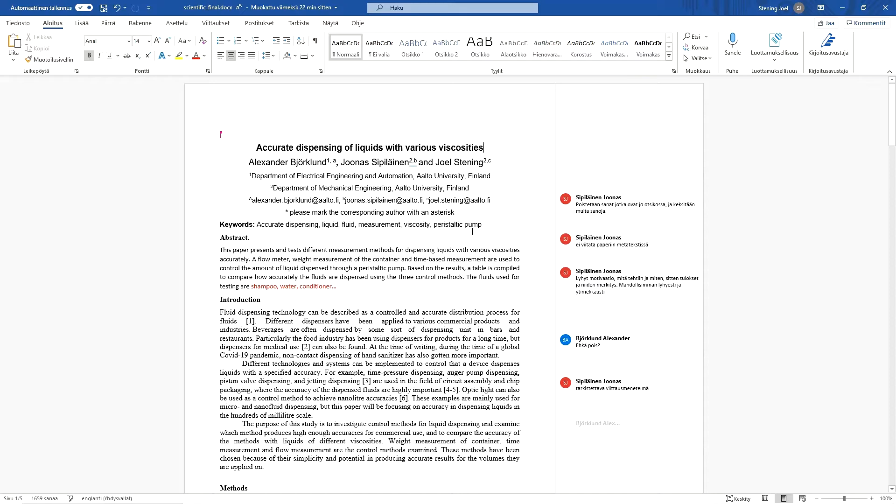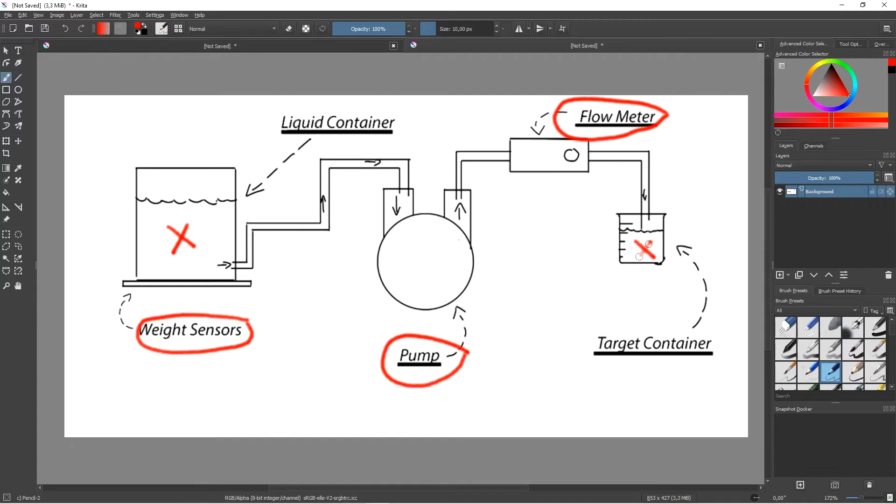And how we did this was that we measured - we did all these tests always for water, shampoo, conditioner, and then hand sanitizer. And for all of these different liquids, we did 3 points with 3 repetitions.

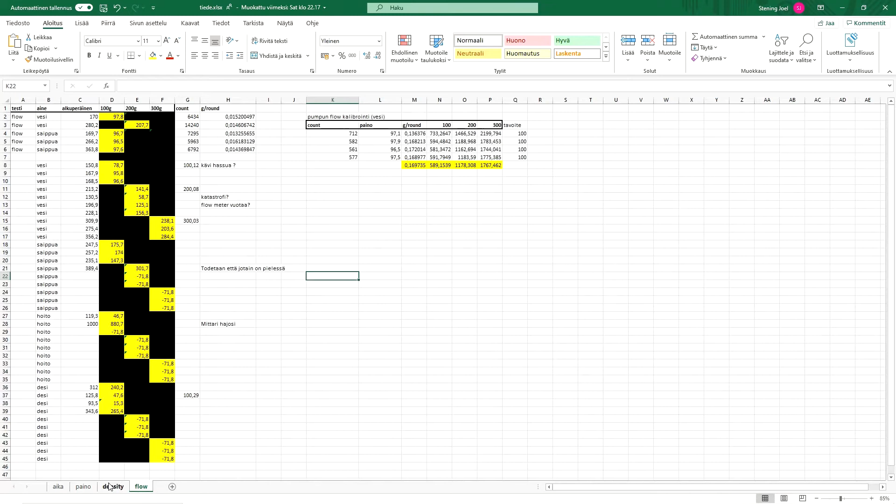How we verified how much we have been pumping was with a scale, which you might have seen in the video. And depending on the measurement, we had different methods of weighing the achieved results.

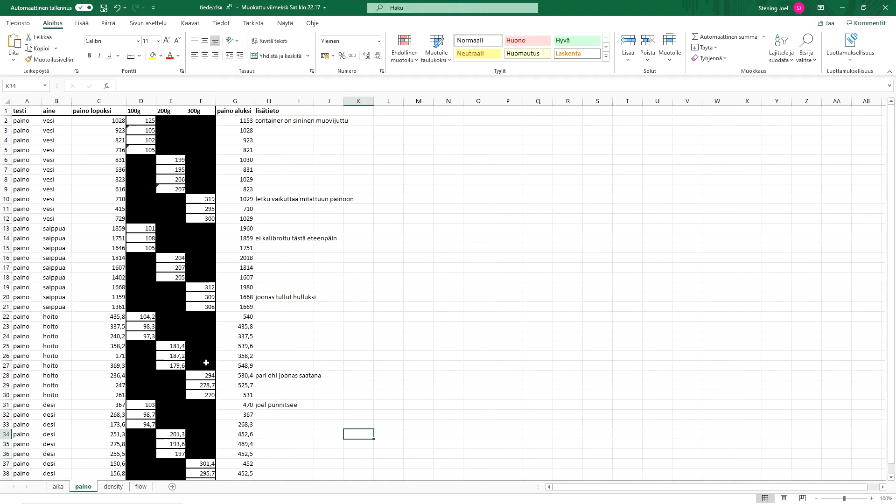On a quick look, we came to the conclusion that the best way to track the weight change or the liquid dispensed to a container like this is actually using the weight sensors.

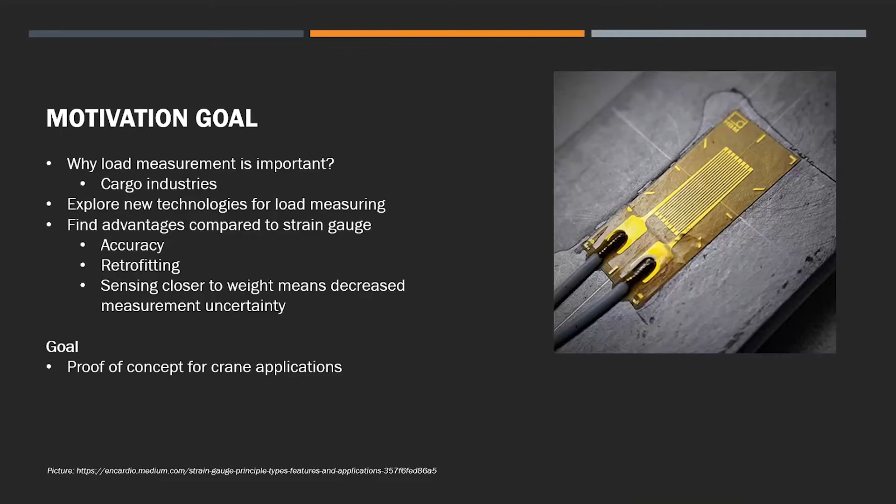It is very important that the material of the core is ferromagnetic. Otherwise, this won't work. The primary coil is connected to a power source.

When we allow the current to flow inside it, the core will be magnetized, and the voltage will be induced in the secondary coil. After the setup becomes stable, we apply force onto the core and observe the change in the voltage in the secondary coil.

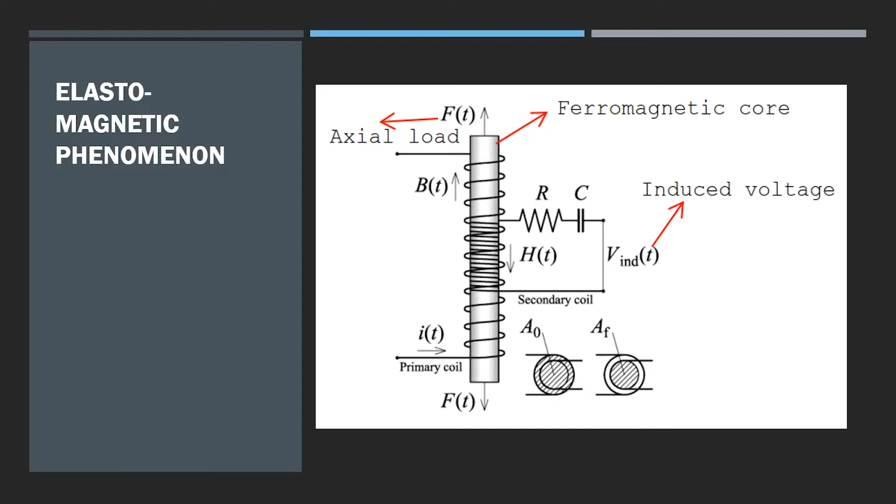From this, we can formalize a relationship between applied force and induced voltage. And so after we got the idea, the project steps become quite clear and simple.

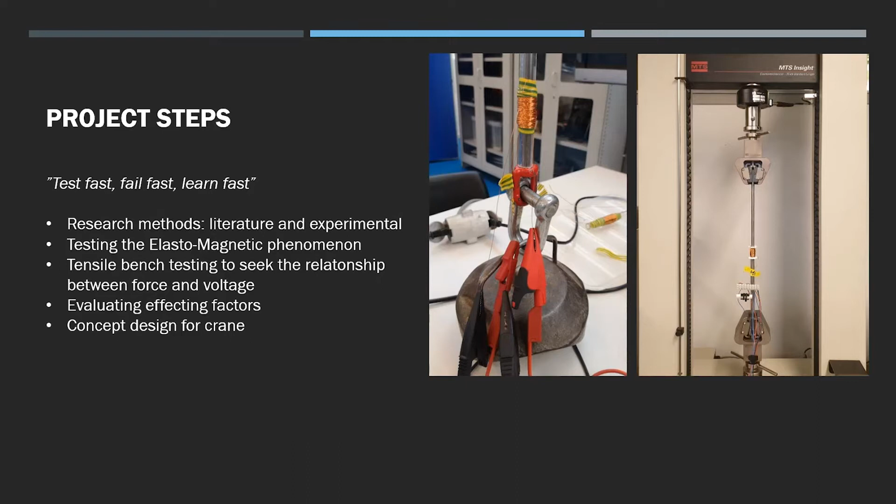There's only one thing that I want to point out here: we used the tensile bench to effectively apply and control the load onto the core. And now Oli will tell you more about the test that we did.

Yes, for testing our device, we scaled it down a bit from the actual size of the crane hook, and we decided to use a 10 mm steel bar to mimic the hook shank that the sensor would be attached to.

The sensing device was then wrapped around this core, and the primary coil was excited using the signal generator and amplifier to act as an AC power source.

For data acquisition, we used high accuracy multimeters to measure excitation voltage and current for the primary coil, and the induced voltage and its change in the secondary coil.

Also, to counter the effect of the temperature change of the device during testing, we attached a thermocouple to measure the surface temperature of the steel core.

With the setup done, we mounted it to the tensile bench, and with that we were able to apply varying loads with high accuracy to the steel bar, to study the effect of the stress on the induced voltage in the secondary coil.

Okay, so here is a short video of testing in the laboratory. In the setup we had an audio amplifier and signal generator, which you can see here.

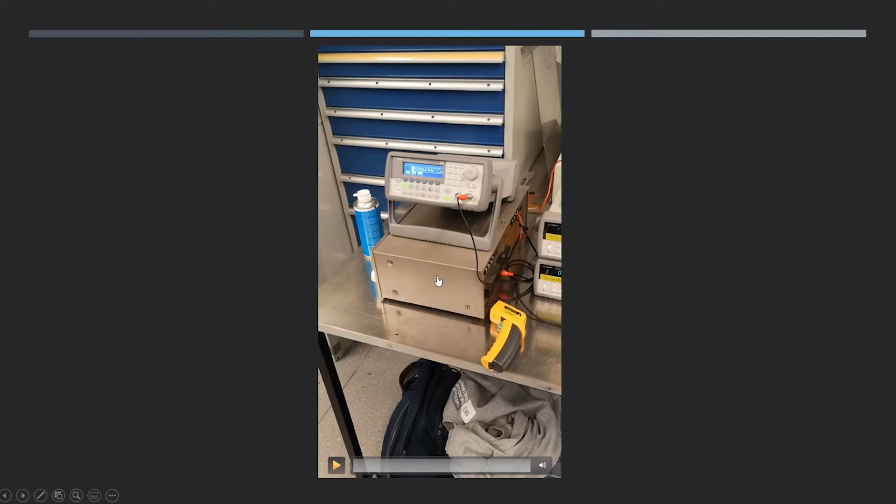Here we have multimeters for primary and secondary coil voltage measurement, and the numbers are changing all the time, as you can see in the video. And here we have the multimeter for current measurements.

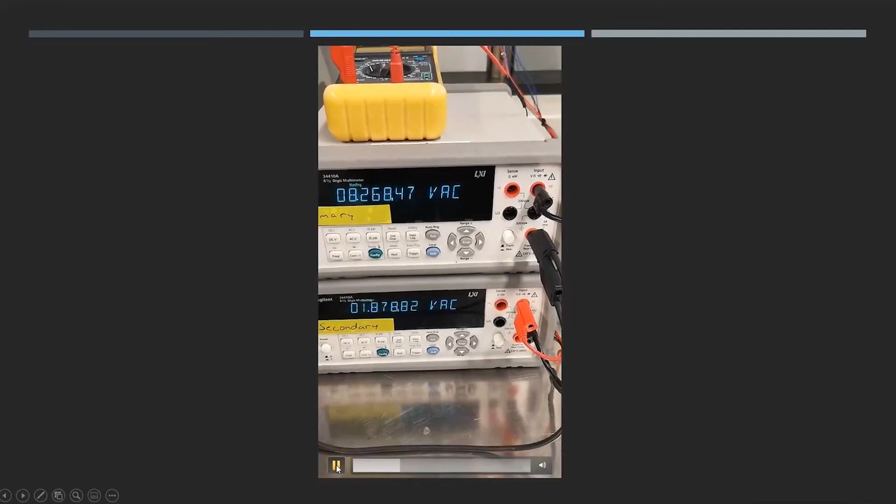Here you can see the temperature measurement with the thermocouple, connected to the multimeter down here.

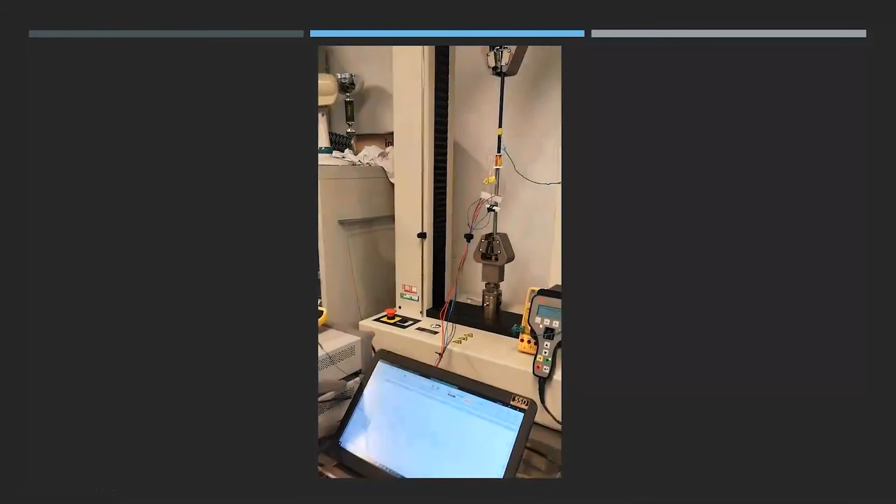And here you can see the increasing load curve from 10 kilonewtons to 12 kilonewtons. And that's the setup.

Then about the results. We expected the relationship between force and induced voltage to be linear, but it was not. As you can see from the graph, we have force on the y-axis and change in the coil voltage on the x-axis.

Instead of a linear relationship, the equation quite well follows this second order polynomial function. Here we have the maximum absolute error of about 300 newtons, and the average error percentage is 5.6, and repeatability error...

Repeatability error is 0.069%.

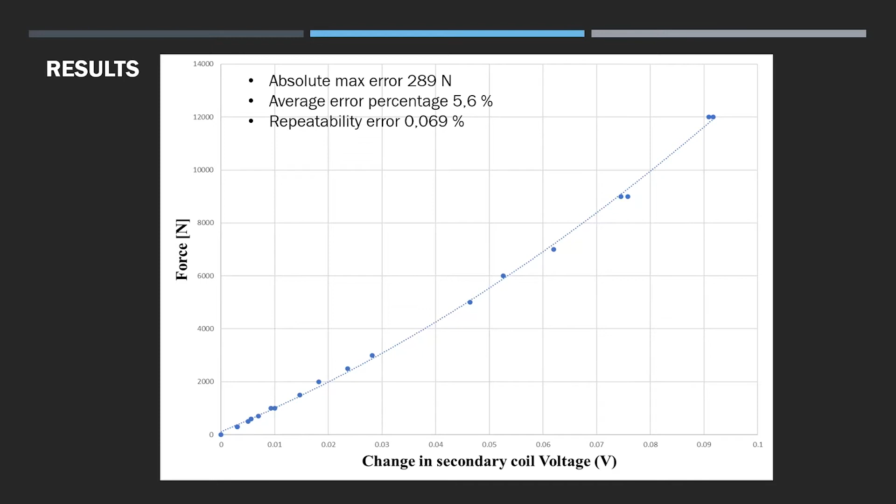Then conclusions. The proof of concept was successful because this EM sensor can be used in crane applications when the force-voltage relationship remains the same for the crane capacity area. The setup we built achieved 94.4% accuracy, meaning 10.4 kilograms average error with loads from 0 to 1,200 kilograms. On the right hand side, you can see the actual concept of our crane sensor.

Here we have a 40 millimeter crane hook shank, and the sensor is 75 millimeters long. It has 1000 rounds on the primary coil and 200 rounds on the secondary coil. The hook material in this one is AISI 1040 carbon steel.

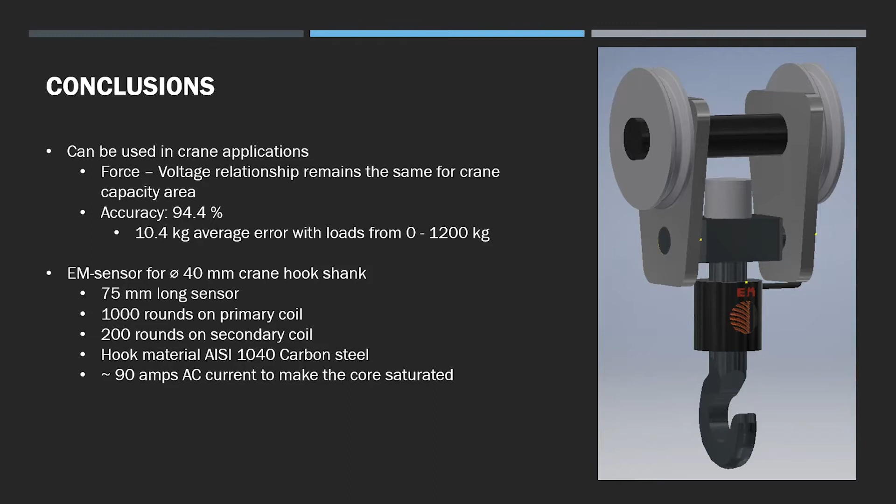And this kind of setup needs approximately 90 amps to make the core saturated. Thank you for your attention, and if you have any questions, now it's time.

Welcome. We would like to introduce our work, which was improving tunnel mode efficiency of a combined azimuth thruster. My name is Jan Gregor, and I would like to quickly introduce what was our goal and what was our task. What is an azimuth thruster?

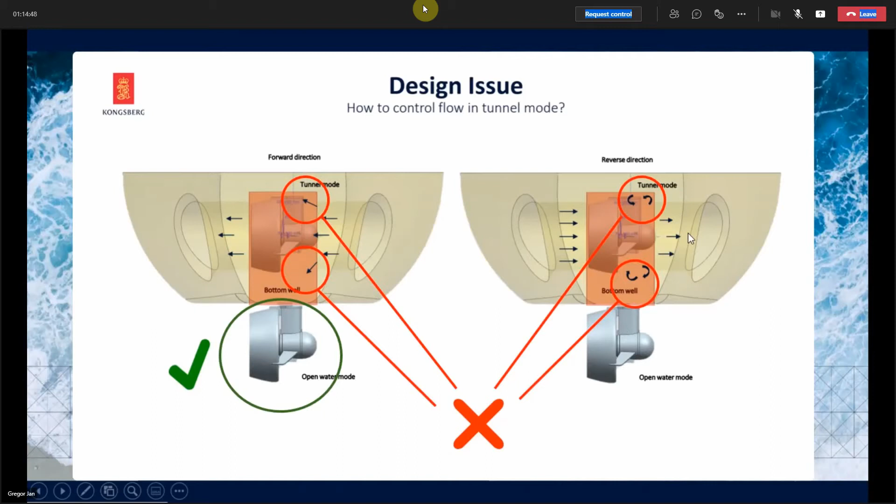With an azimuth thruster, ships achieve propulsion and steering, so you can manipulate the ship basically. A combined azimuth thruster, which is a specific kind of thruster, has two operation modes: open water mode, which is used most of the time, and tunnel mode, when the thruster is retracted back and can be used in shallow waters. The problem of the current design is that the efficiency is good in open water mode, but not satisfactory in tunnel mode, especially in the reverse direction, because some flow is leaking in the bottom well, or there is circulation of the flow.

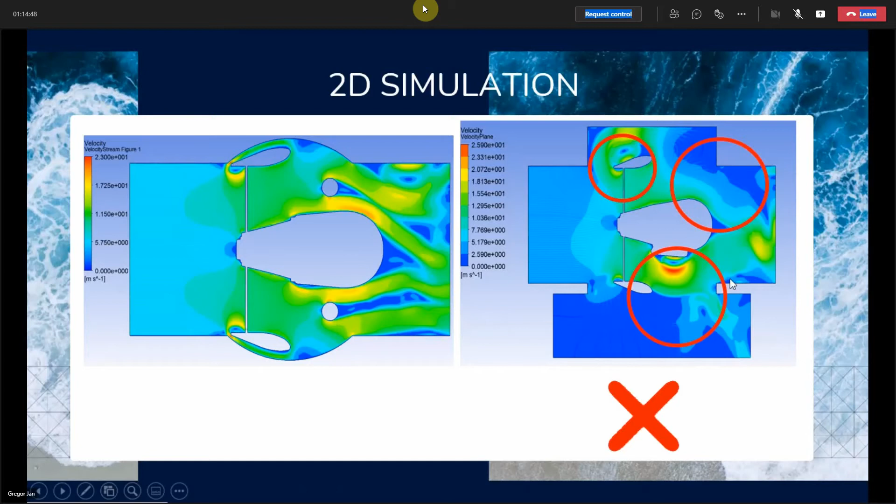We did background research on the topic, and to understand the behavior better, we created a 2D simulation in two perpendicular planes. On the left, in the horizontal plane, there are no problems at all. But on the right, in the vertical cut, you can see there are some problematic places where the flow is leaking, not behaving as we would imagine, or there is some circulation.

We made improvements to the construction, using a combination of static structures and a movable flap. The flap is open when the thruster is in open water mode, and closes the bottom well when the thruster is retracted back. Together with the static barriers, this makes the flow continue and avoids the circulation or other things we didn't want.

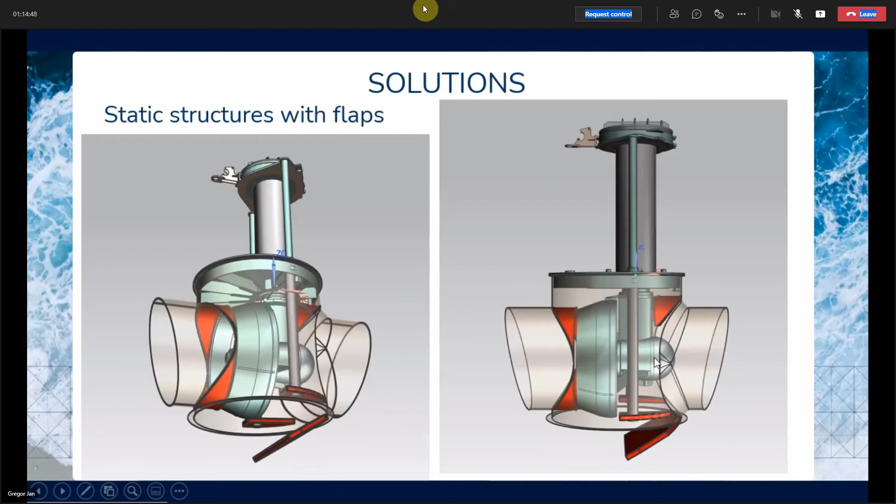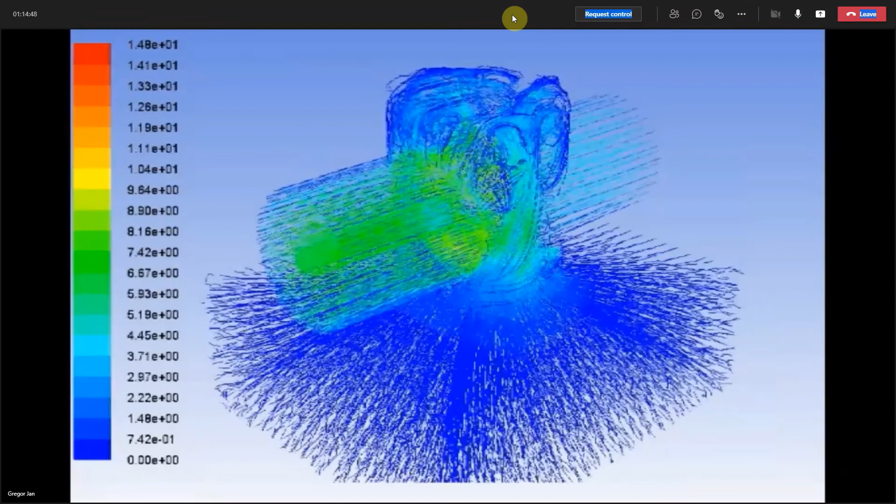We simulated the behavior of this with CFD simulations, and Jan is going to tell you something about that. So, here you can see the initial forward flow of the tunnel. It looks really good at this point, with some small circulation in the upper part. But on the backward motion there is much more turbulent flow in the tunnel, and it circulates quite a lot.

Here, when the same thruster and tunnel is closed underside and nothing else is done, you can see what the circulation really is around it. So it circulates the flow and nothing more goes to the tunnel.

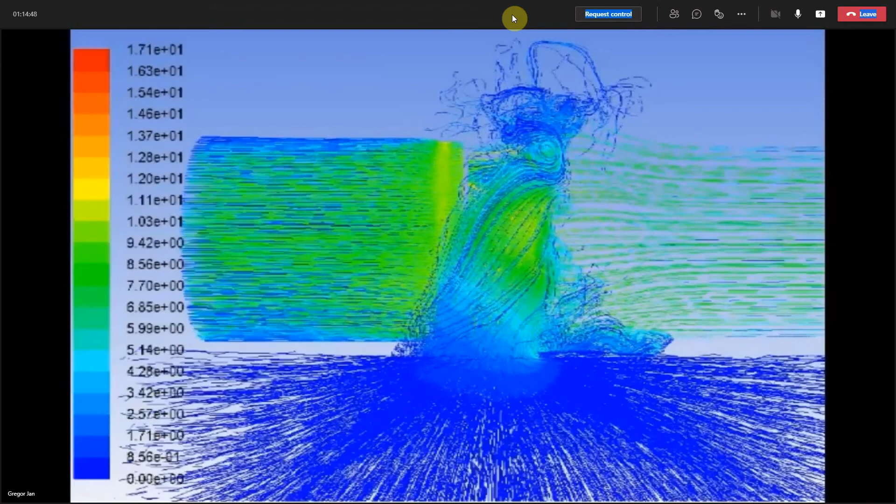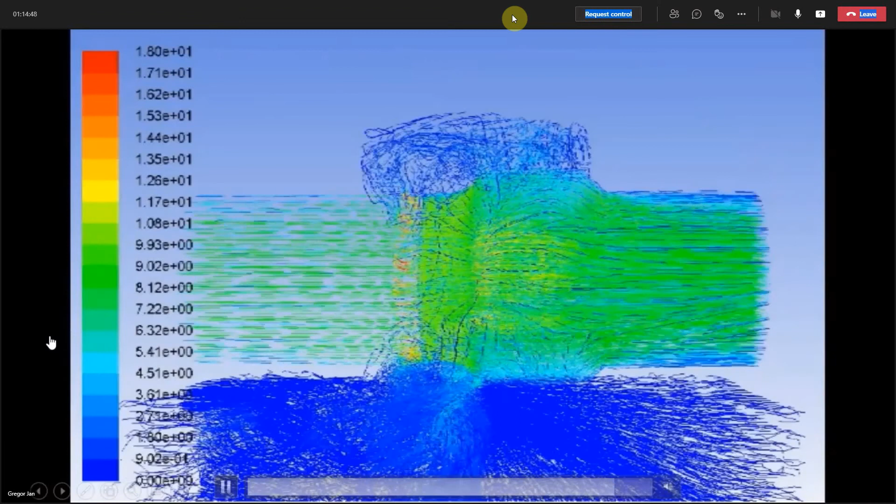Here you can see results: forward, we got some improvement, but it sucks quite a lot from underside. The flow is going to the tunnel, and its efficiency is about 95% here. But here we got much better improvement for the backward flow, now the efficiency is almost 90% this way. In the initial design, it was only 64%.

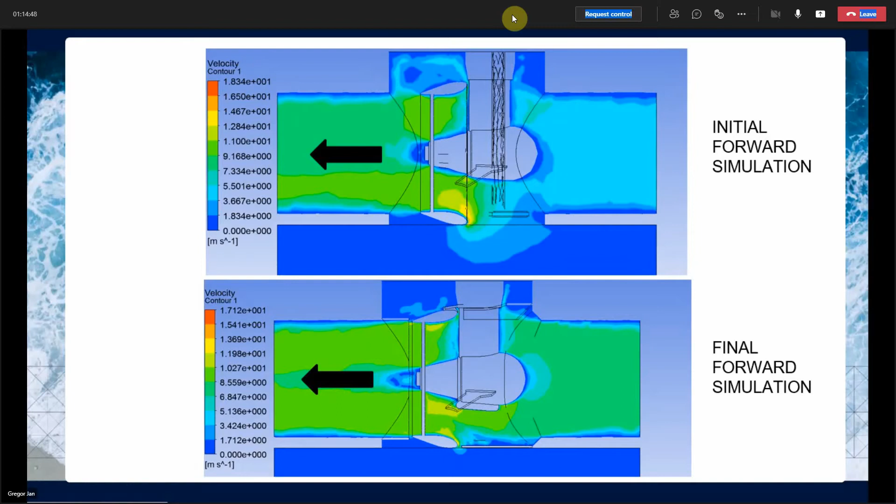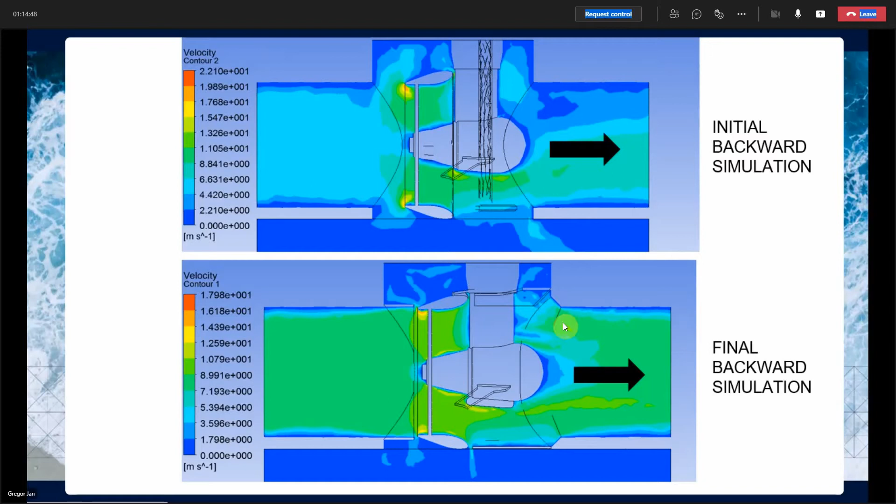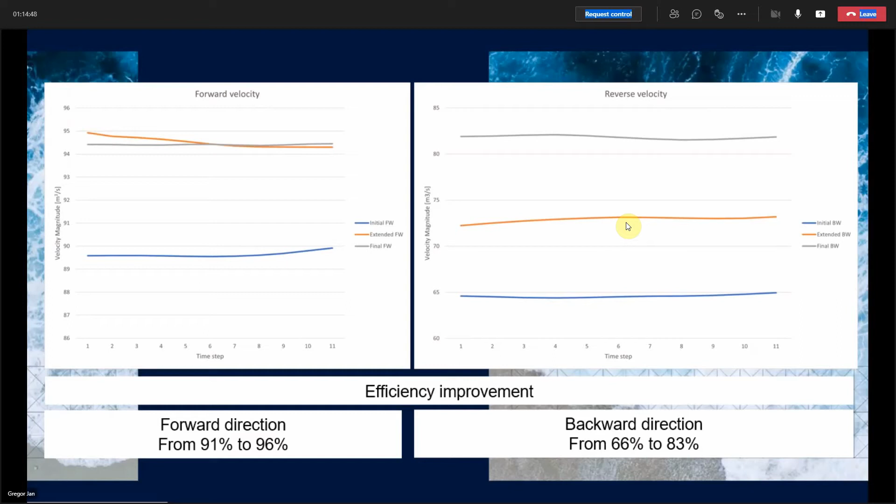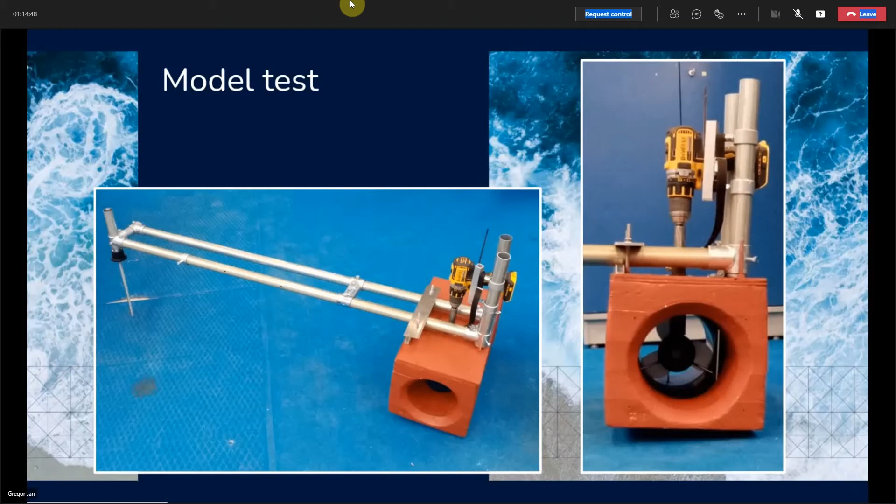The space needed for our setup was bigger than a cubic meter water tank, but the Aalto Marine Lab was closed due to the pandemic, so we had to rig the experiment set outside. It was pretty cold and windy in Otaranta, and due to technical difficulties we did not get results to compare with the simulation, but we did get some good experience from the field tests.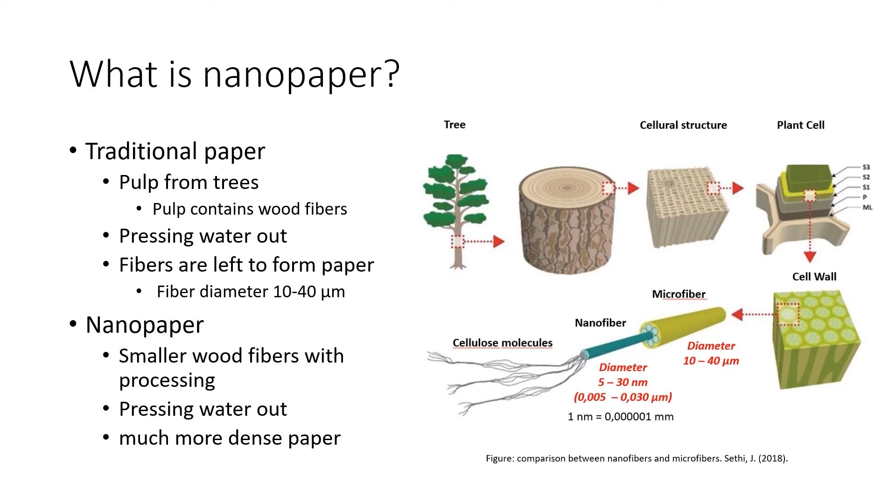So why are we not using this great potential and these properties already? There are still many challenges in commercializing nanopaper. Because of the smaller fiber size compared to normal paper pulp, more energy is needed to dewater and dry it. Because of this energy consumption, the scalability of production is still not figured out, and the price of nanopaper is not on par with normal paper. The dewatering and drying process must be researched to enable commercial production at some point. With this small introduction, we'll now move on to what we have been doing in our project.

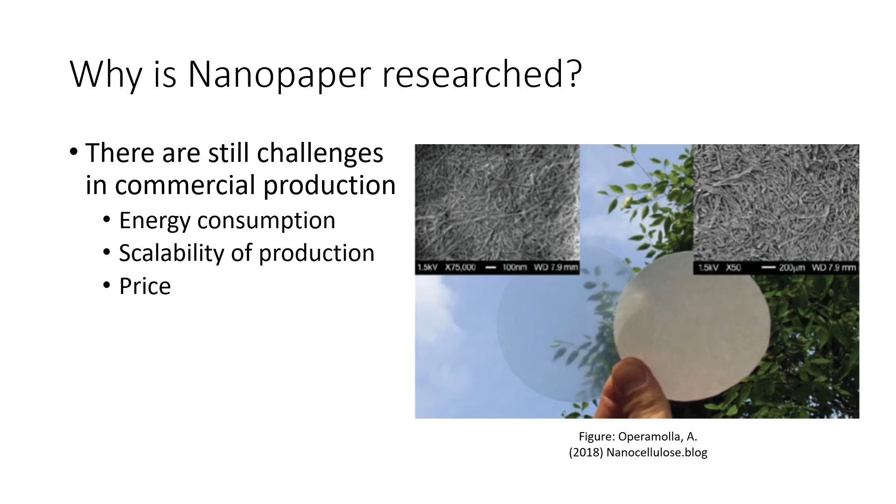As mentioned before, the project was done in collaboration with the Bioproduct Center of Aalto University, and our objective here was to see how pressure and airflow affected drying rate of the formed paper.

To do this, the group had to design an airtight device that would be under pressure and possibly be exposed to boiling temperatures. It was also requested that the chambers would be transparent in order to see the process of paper forming more clearly. As for the device itself, it is rather modular, meaning we can add different sensors, change the filter plate, and add more components.

This gives the device more value because building the device is only one step of our project. Gaining data on how nanopaper dries under pressure was the purpose of building the device. The modularity of the device allows us, for example, to research how temperature would affect the drying rate once the necessary sensors and components are added.

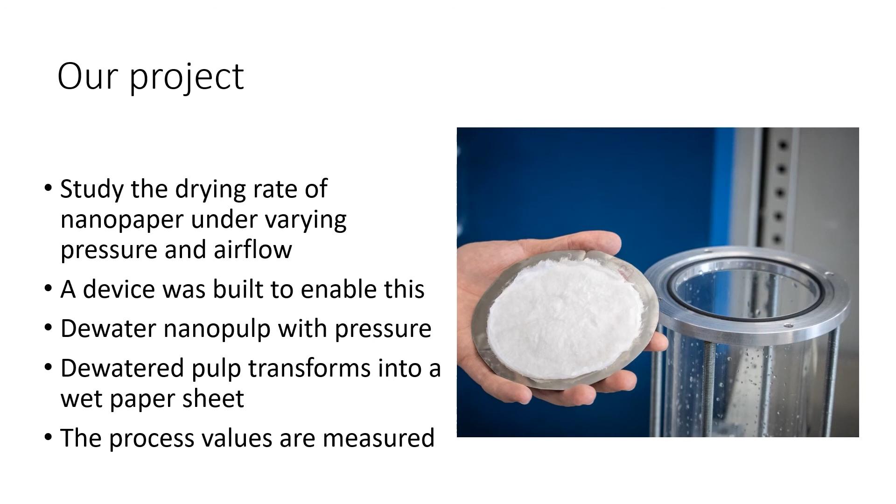The process is done in two phases. The first phase focuses on producing the paper sheet on top of the filter plate. This is done with the help of pressure, which forces the water from the upper chamber to the lower. The only thing left is the wet paper sheet on top of the filter plate.

After the first phase, we remove the water from the bottom chamber, wipe the chambers, and weigh the filter plate that holds the paper sheet, and place it back.

On the second phase, we increase the pressure and add a vacuum on the bottom chamber. This is also when we start taking measurements of pressure and airflow. The second phase is kept going for a couple of minutes before we turn off the pressure valve.

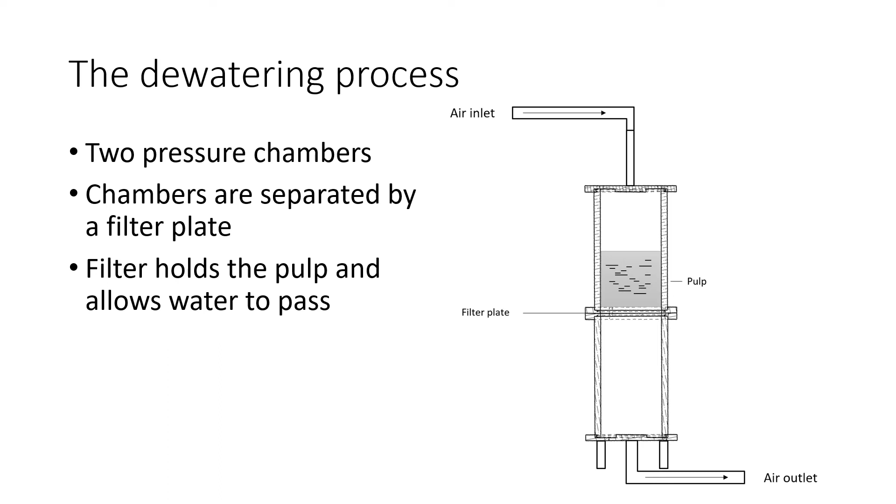After the second phase, we take the filter plate out and weigh it again. The difference in weight tells us how much the paper dried. Next, we will show you a video that visualizes the first phase of our process.

Hi everyone, my name is Tuukka Virkki, and this is my colleague Po Lim. We're going to introduce you to our nanopaper process and the device.

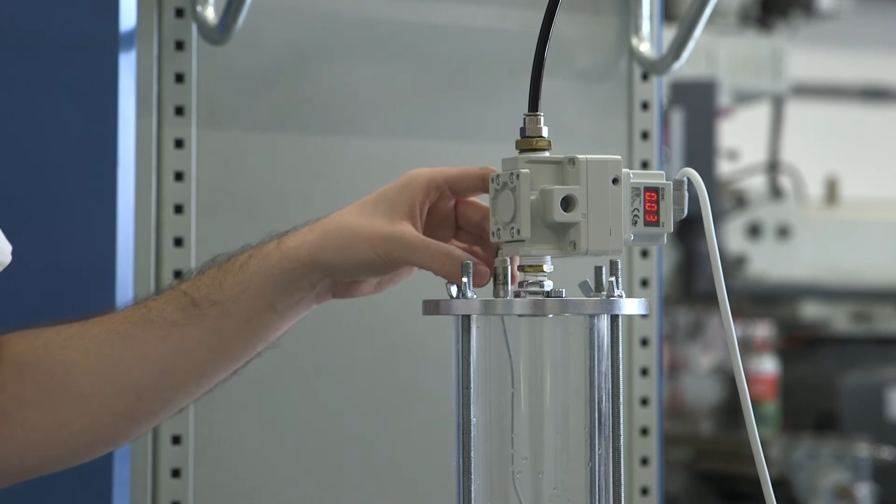So here we have our nanopaper device, which we built. On the top here, we have our pressure regulator, our pressure sensor, our pulp, and our flanges that contain the filter plate, and on the bottom we have our draining system.

So now we have our power supply connected to our pressure controller, and next my colleague is going to give out a signal to the controller, and we will increase the pressure inside of this chamber.

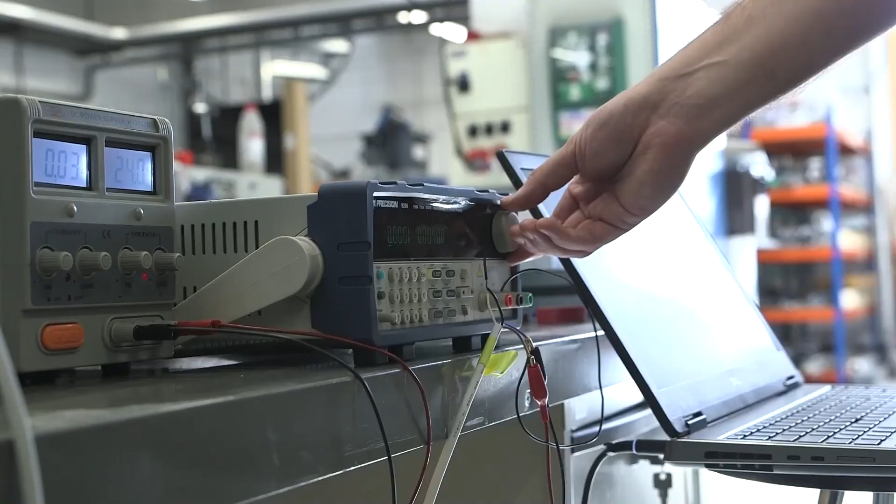This leads to the water going down to the next chamber and through the filter plate. When we increase the voltage, the controller allows us to have pressure in the first chamber. Next, we apply pressure to the chamber.

After all the water has drained, we can disconnect the middle flanges and take out the filter plate with the paper sheet.

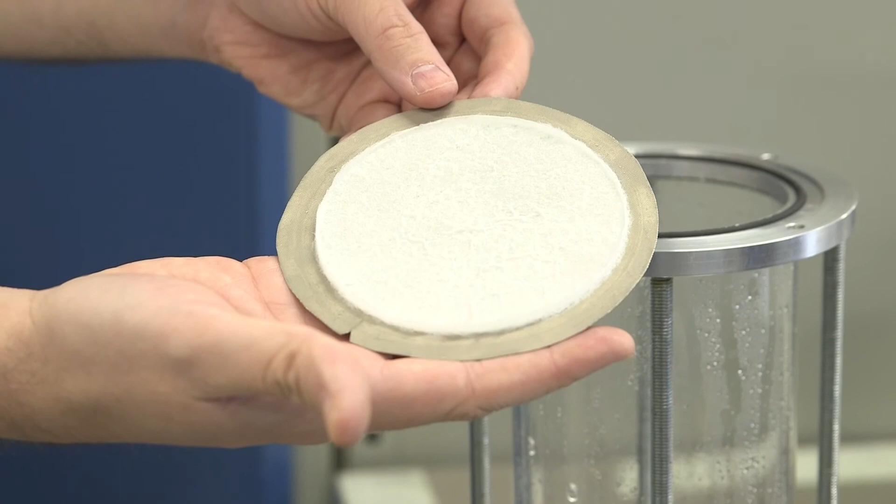This was the first step of our drying process, and in the end you could see the wet paper sheet that was formed. This wet paper sheet still needs to be dried, and that happens in the second phase with the help of increased pressure and airflow.

In the video, we conducted a test run of the process with normal paper. For phase 2, we set the pressure to 2 bars, while the lower chamber valve was open. The paper dried completely in 5 minutes.

Our future plans are to add an air heater so we can also study the effects of temperature on the drying process.

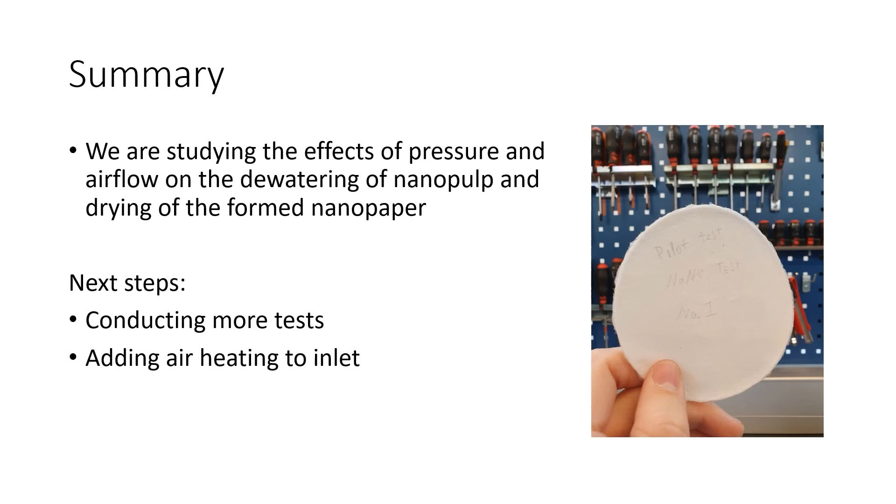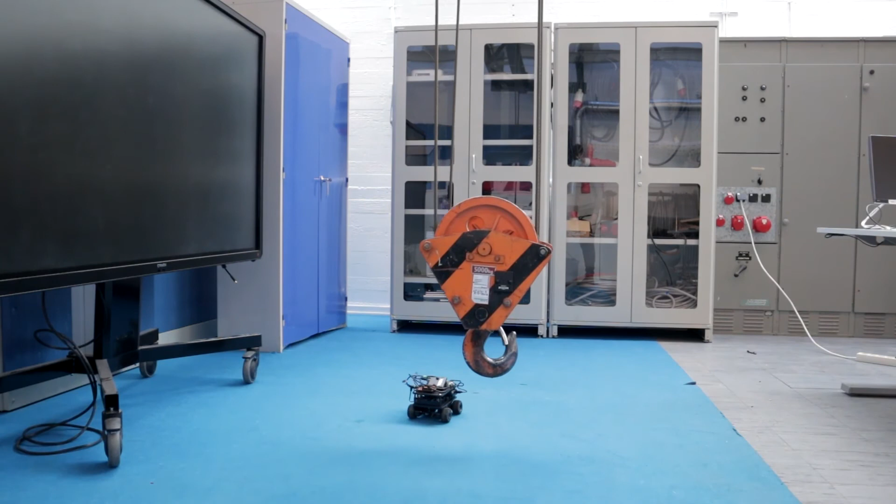Hello, I hope this teaser video triggered your interest in our topic, and our topic is ultra-wideband localization for crane robot cooperation. Our team consists of myself, David, and Wang-Fu, and now we will show what our research project was about.

Our outline is structured as follows. We first start with the research problem, then we will describe our system, then we will describe what our experiment is about, then we will show the results, and then we will come to a conclusion.

First, we come to our research problem. With the rise of IoT in industrial environments, more and more processes will be automated in manufacturing and logistics, including the automation of material flow processes. However, in indoor environments, there is no access to global navigation satellite systems like GPS. Therefore, ultra-wideband localization systems like the one we're using are a promising replacement for GNSS.

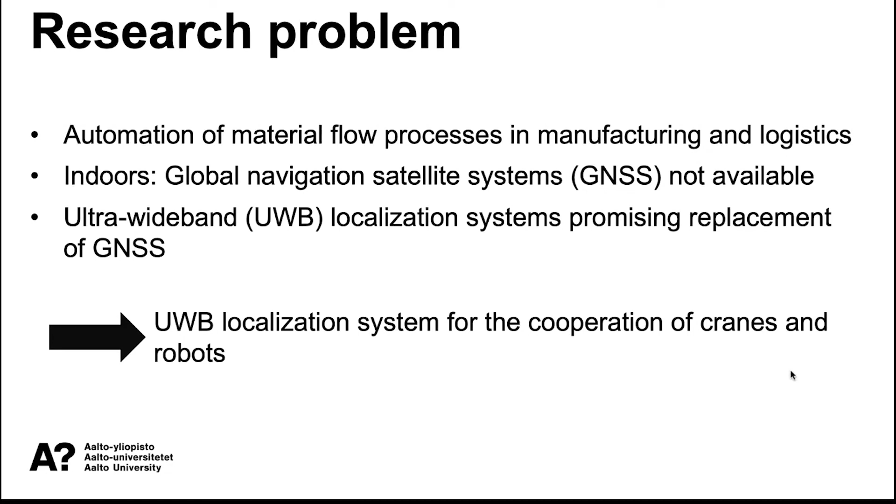The advantages of these systems are that they're relatively inexpensive, and after the system is installed in the environment, you only have to buy inexpensive tags that need to be localized for each robot. Another advantage is that you can retrofit these systems to older machines, and use commercial systems that are available, for example the one we are using from Noccela, which is easy to use and very simple. Therefore, we try to implement an ultra-wideband localization system for the cooperation between cranes and robots.

Here you can see the overview of our system. Our system has three components. We have the ultra-wideband localization system, which consists of 4 beacons on the ceiling in the laboratory and 2 tags, one for the robot and one for the crane. Then we have a wheeled robot platform and an overhead crane.

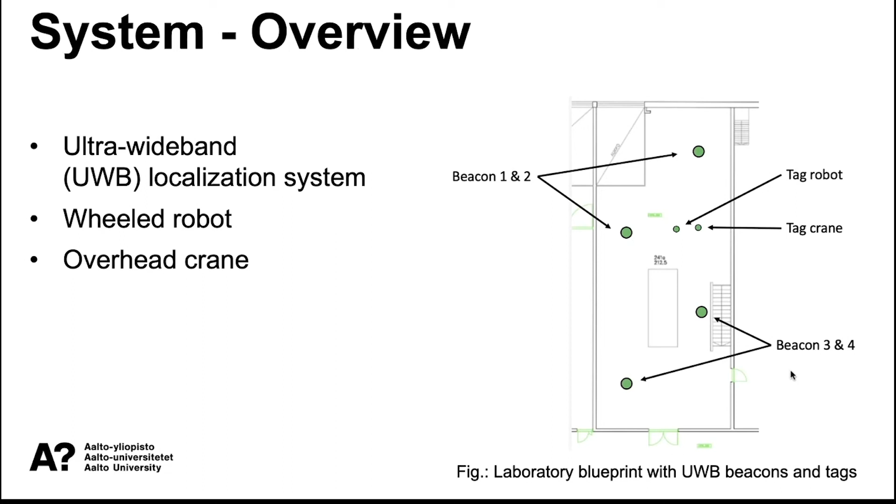Now we come to our ultra-wideband system. This is the only sensor we will use to control the robot. We used a commercially available system from Noccela, a Finnish company. The system consists of beacons, which you saw in the video already, on top of the ceiling, and tags that are placed on the robot and the crane.

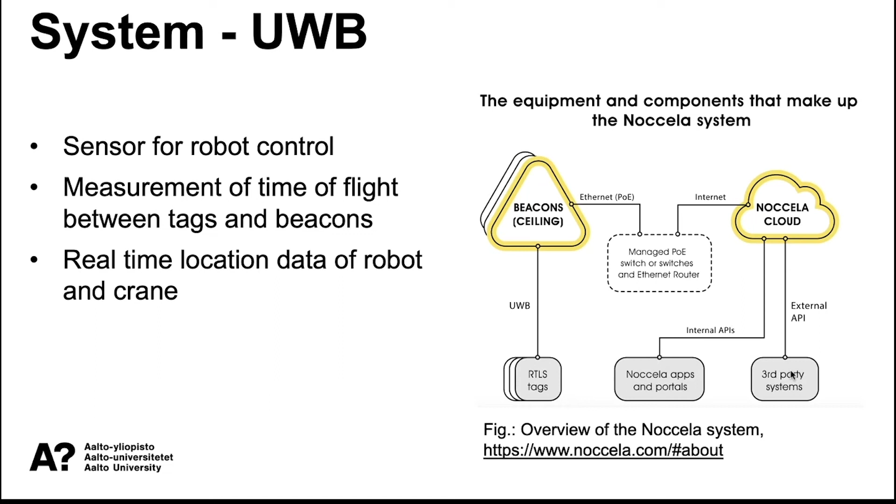This system measures the time of flight between an ultra-wideband signal that comes from the beacon, is reflected from the tags, and goes back to the beacon. With this time of flight measurement, you can calculate the position of the robot and the crane. The measurement data of these beacons will be sent to the Noccela cloud, where we can retrieve the data and do our calculations and control. This all works in real time.

Now we come to our robot. We used a wheeled robot platform, which is quite simple. For our high-level control, we used a Raspberry Pi, and for our low-level motor control, we used an Arduino. The robot has 2 motors for each side.

Our control software is based on the robot operating system, which is the most popular software framework for robots right now. ROS code consists of nodes, which are, in our case, Python code. These nodes publish or subscribe to different topics, which are messages between the nodes, and these nodes are, for example, sensors, motors, or a control algorithm.

For the ultra-wideband sensor, we have a WebSocket, which retrieves the measurement data from the Noccela server. This code also does some filtering with an average of 10 samples to get more accurate data.

Then the navigation node subscribes to the location data and uses this to control the robot. We used a really simple control algorithm with 3 modes: forward, stopping, or backwards. These modes depend on the location difference between the crane and the robot. If the crane is in front of the robot, it will drive forwards. If it's under the crane, it will stop. And if the robot is in front of the crane, it goes backwards.

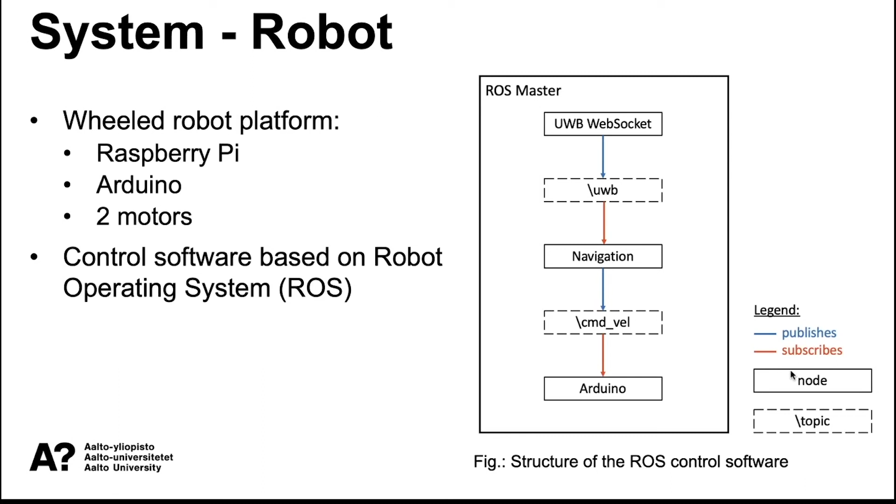Then this navigation node will send PWM commands, which are the motor commands, to the Arduino, which then controls the motors.

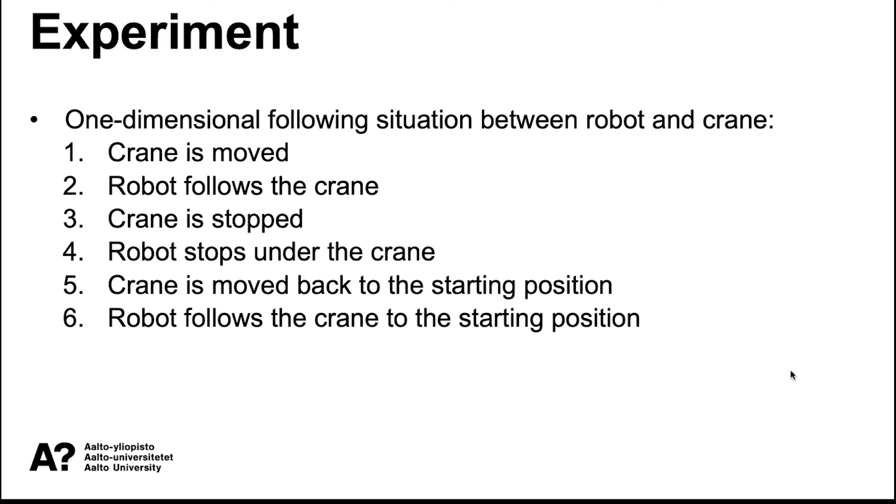Now we're coming to our experiment. We are doing a one-dimensional following situation between a robot and a crane. The first step is that the crane is moved by an operator. Then the robot follows; the crane is stopped, and the robot should also stop under the crane. Then the crane is moved back to the starting position, and the robot should also follow to the starting position.

This is mostly due to our control algorithm, which is really simple and easy. It also has some tolerances, which means that it's never completely under the crane, but more in a radius that we defined, that we say this is still acceptable to be under the crane.

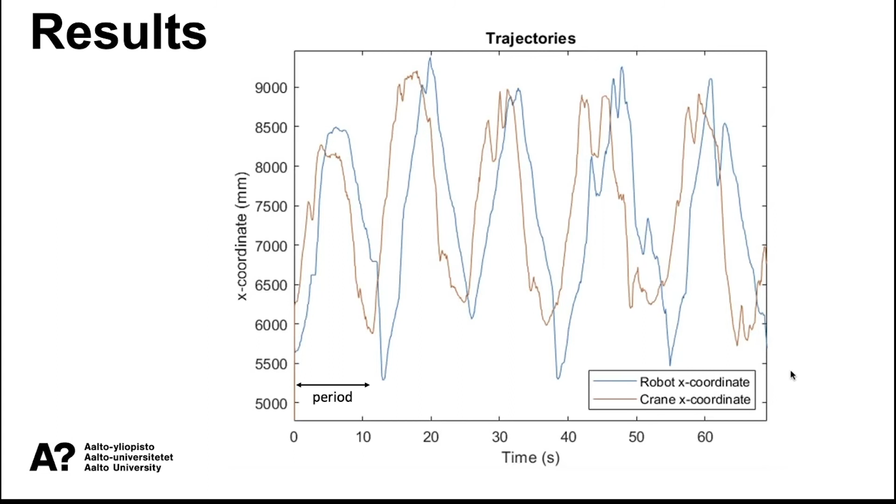In conclusion, our experiment results show that an ultra-wideband system can be used to automate material flow processes, for example, our process of a robot-crane interaction, and a slight delay and overshoot of the robot due to primitive control and filtering algorithm is still there.

For future research, we should improve the control and filtering algorithm to decrease the delay and the overshoot. We should also increase the complexity of our cooperation process. For example, we could do a two-dimensional following situation. It would be harder, but it would be more realistic.

In the end, it would be good that there's a case study in a real manufacturing or logistics environment, and not just in the laboratory.

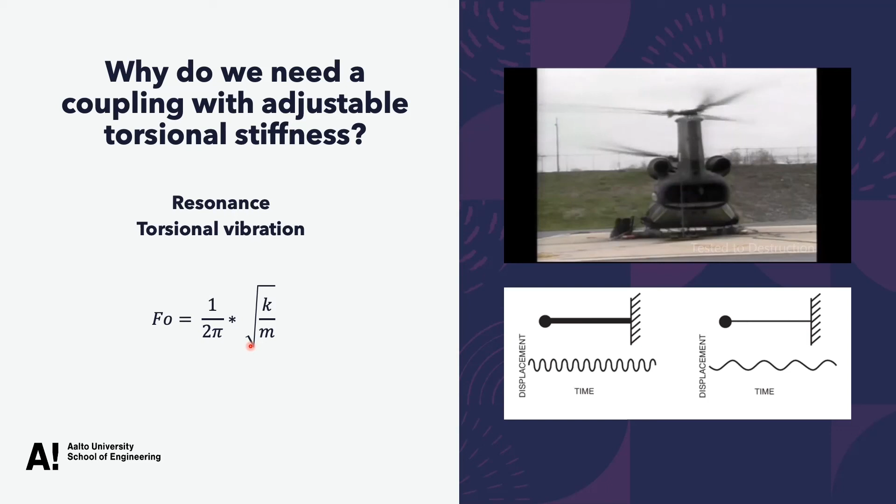Here we can see the simple natural frequency formula depending on mass and stiffness of the system. Since we can't change the mass, the goal was to find a way to change its stiffness, obtaining variation of the natural frequency of the system. Knowing the definition of resonance, changing the natural frequency of the system allows us to avoid the phenomenon of resonance.

Okay, next is the coupling design. The goal of the project was to design, manufacture and test a coupling with adjustable torsional stiffness. We designed two different couplings.

The first one, on the top right, is the beam coupling, where beams are used to adjust the torsional stiffness. The lower right is the spring coupling, which uses springs to adjust the stiffness. In the end, the beam coupling was chosen to be manufactured and tested.

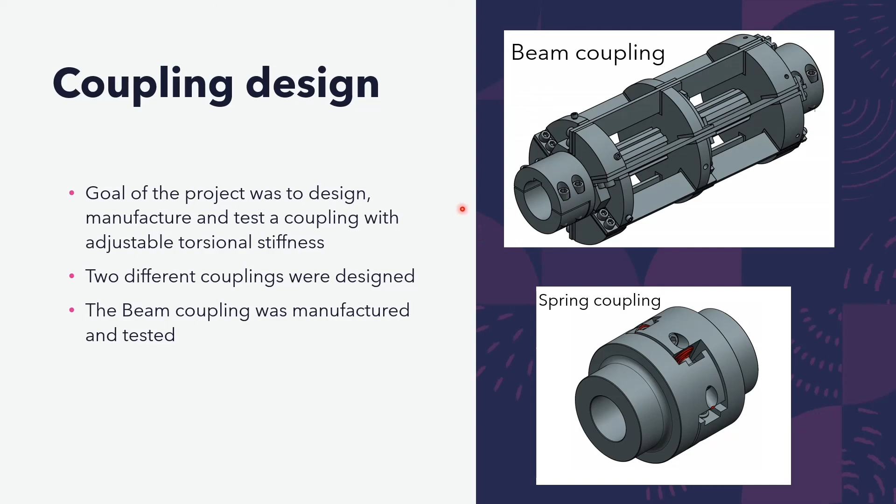Let's go over some parts of the coupling. First we have the input half where the motor is attached. Then you have the beams and the adjustable flange. Then we have the middle shaft and the output half. On the left you can see a section view of the coupling.

The coupling works when we attach a motor on the input half. The torque gets transferred through the beams to the adjustable flange. From the flange it goes through the middle shaft, which is fixed on the output end, and the output half transfers the torque to the rotor.

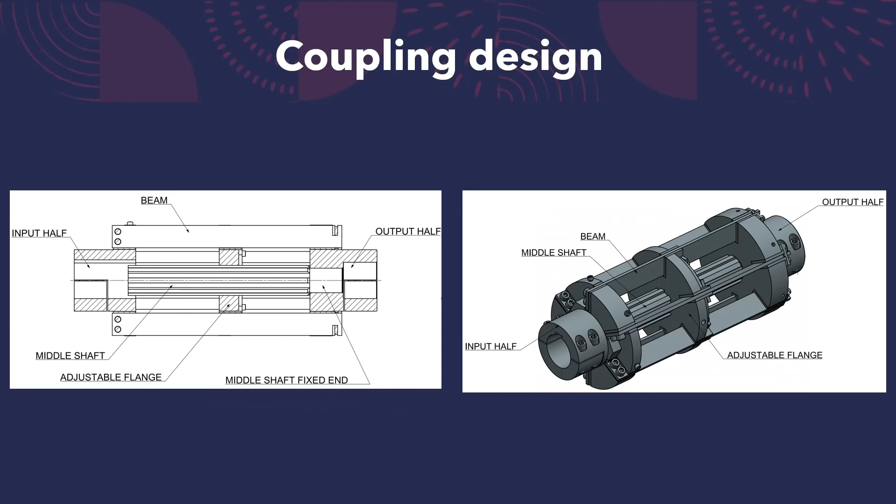The stiffness of the coupling is adjusted by changing the effective length of these beams. On the bottom right you can see a typical cantilever beam. The effective length is the distance between the clamp and the force. When we increase this distance, the beam starts to bend more. We are basically using the same principle in our coupling.

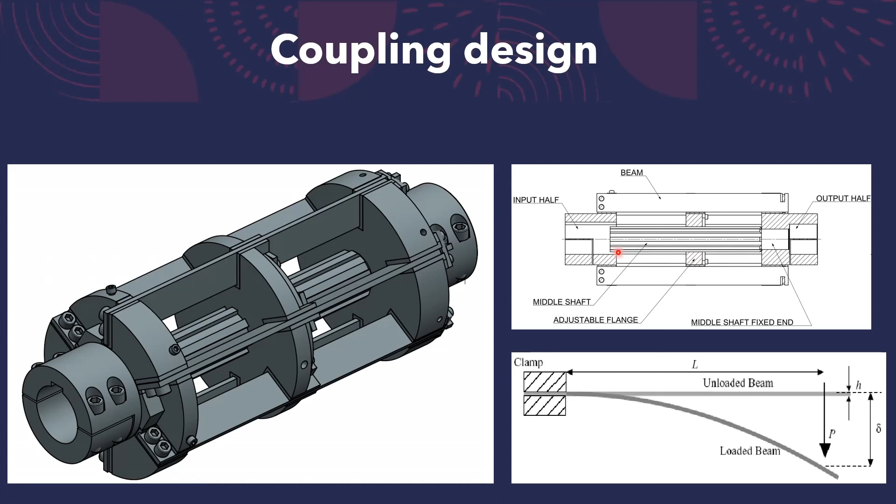The effective length is the distance between the input half and the adjustable flange. Basically, we are moving the adjustable flange to change the stiffness. The middle shaft is fixed on this end, so when we move the flange to the right side, the effective length increases and the stiffness decreases. When we move the adjustable flange to the left side, the effective length decreases and the stiffness increases.

Here we have a couple of pictures of the manufactured coupling. On the left you can see the coupling assembled and ready. On the right you can see the coupling installed into the Aalto University rotor lab test bench.

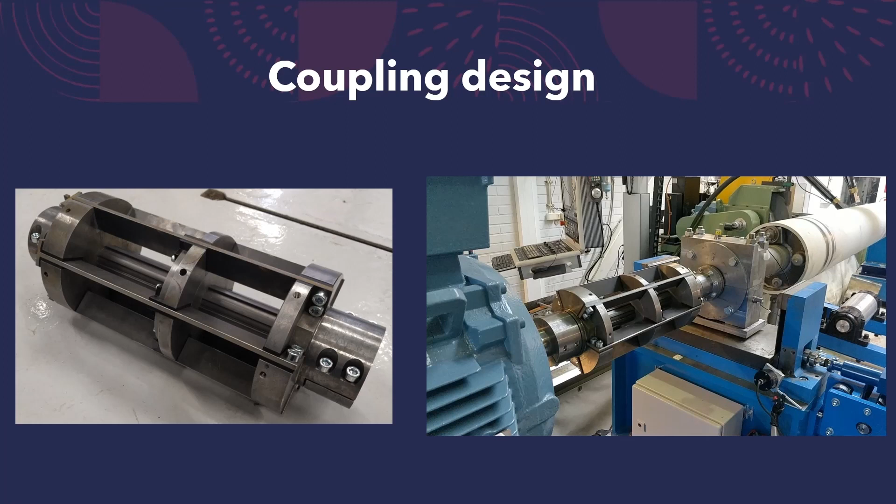We tested the stiffness by attaching the coupling to a lathe. This side of the coupling is fixed, so it cannot rotate. This side can rotate, and we measure the displacement here. From this displacement value we can get the rotation angle of this side of the coupling. We exert torque here with this wrench, and there's a weight hanging out of it. From this display we can read the torque values.

We obtained a stiffness versus central disk position curve. On the y-axis we have the stiffness, on the x-axis we have the central disk position. Here with black stars we have the experimental data. As we can see, we get a good range of stiffness, with higher and lower values compared to the previous coupling used in this application.

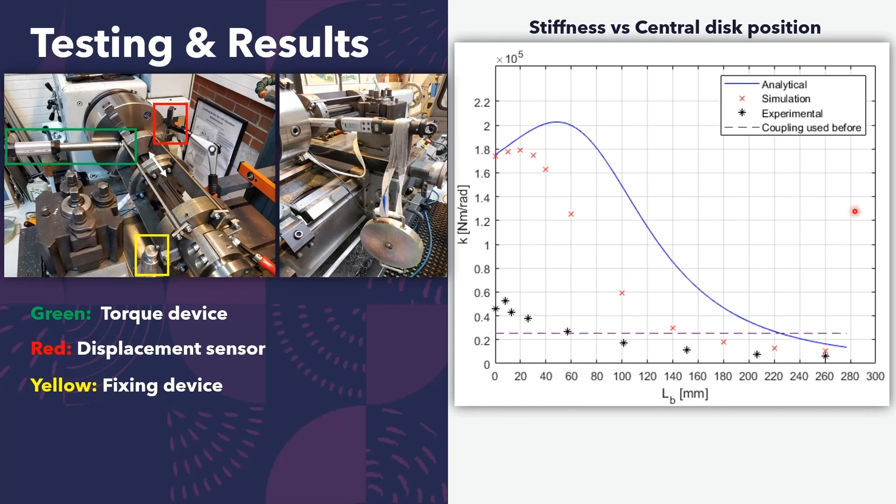The analytical and simulation results had much higher stiffness values because they didn't take into account these plastic parts here, which have a low stiffness. In the future, we could measure how the stiffness affects the natural frequencies of this kind of system, where the coupling is attached to a motor and a rotor.